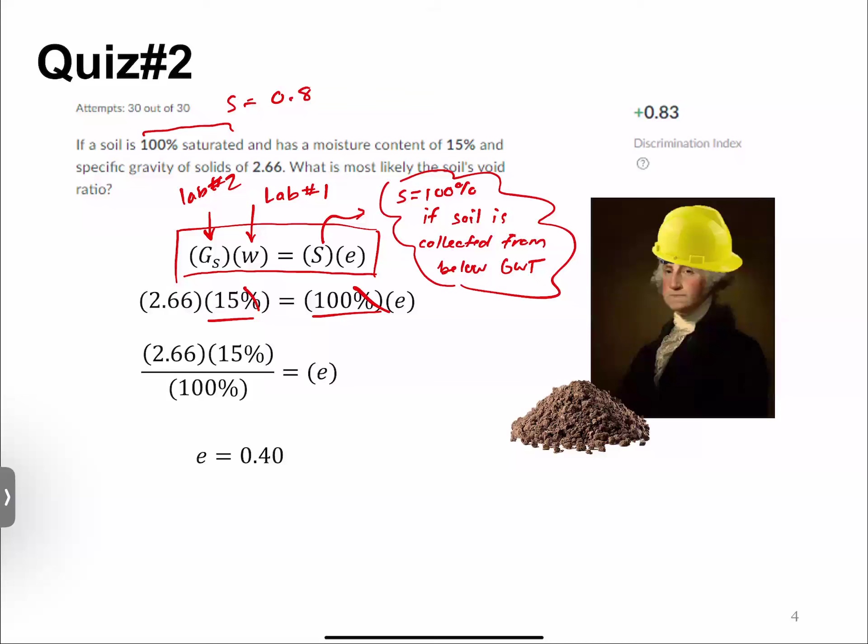Okay, so we're going to wrap up what we talked about last class. Again, I'm just going to put these here, but hopefully you've already filled this out - I don't know why that deleted it here. But we started talking about this range of void ratios.

You have a question? Yes. So you were just saying about how different soils, after time, may not have the same amount of infiltration and stuff. When you take that core sample, do you really just see the different layers of sediment, or actually how dense the material is? Yeah, so it depends on the type of coring that you have.

There are different testing methods or ways of retrieving soil out of the ground that will either keep the soil intact fabric-wise, to make it a nice representative sample of what it's like underground, or just pull it up so you can run a grain size distribution or something where the moisture, or one of these values, isn't going to change with disturbance like compaction or void ratio. We'll get into that when we start talking about subsurface testing techniques. But your typical boring will wash it with water to drill through it, so you're messing up the groundwater regime, you're messing up the soil fabric, because you're essentially pressure washing the soil. That's a good question - we'll cover that in a lot more detail in a few lectures.

So that range is important. We talked about the different correlations to that. And what I wanted to introduce is this theory of what we call empirical relationships, which maybe some classes you've gone over have used before, but they are really heavy in geotechnical engineering, and that's because geotechnical engineering is very site-based.

So empirical relationships take data from the field, from experiments, and then set some type of statistical correlation or statistical function so we can make a prediction based off of the data that we have. So this is really helpful, but there's a huge caveat: this function or empirical equation is only accurate or proven worthy of use for the data that is training it, essentially.

And this is a whole thing too with AI, if you've ever gotten into that, the data that you're using to train your AI model is just as important. So this empirical relationship is only developed based off of these factors here, this data that they use.

So nowadays that we're sharing a lot more data, and we have communications and collaborators in all the different continents and are able to share data, we can start to make some of these empirical relationships a little bit more robust or more applicable to various types of data. But it's always important to keep that in mind when you start seeing this.

Because geotechnical engineering is full of these empirical relationships. Hopefully you can start to identify them based off of these equation formats. They're usually pretty easy, pretty linear or a log-based equation.

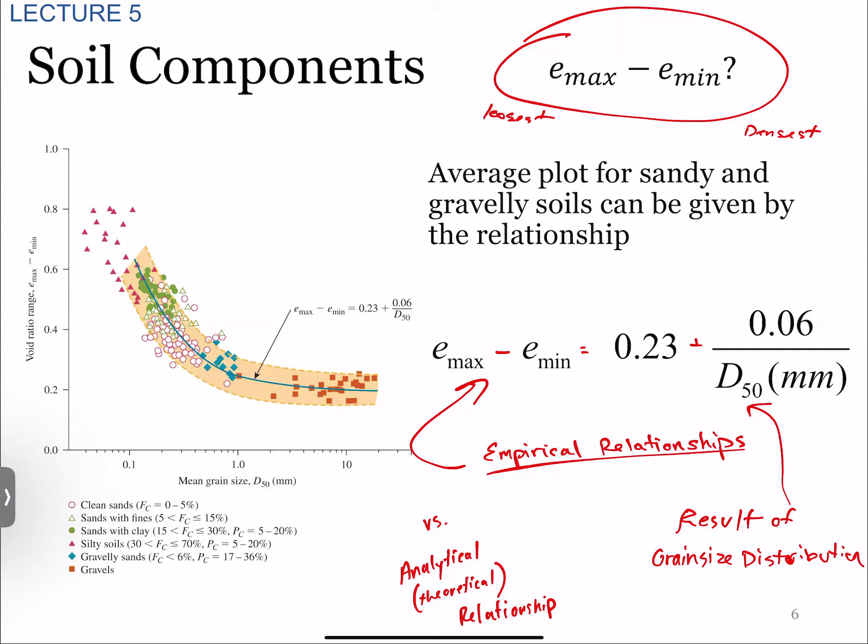All right, so that's where we ended on lecture 5 from Thursday, but we have a few more slides I want to go over. During the very beginning, when we were talking about a bunch of different types of parameters that we care about, I had mentioned submerged density.

Submerged density is shown with a little apostrophe after it. And what we use more so is submerged unit weight, which is gamma prime here. The other way of showing this might be gamma sub. We use this when the soil is 100% saturated and when the in situ soil is under the groundwater table. So submerged density, the effective density, is also what it's called.

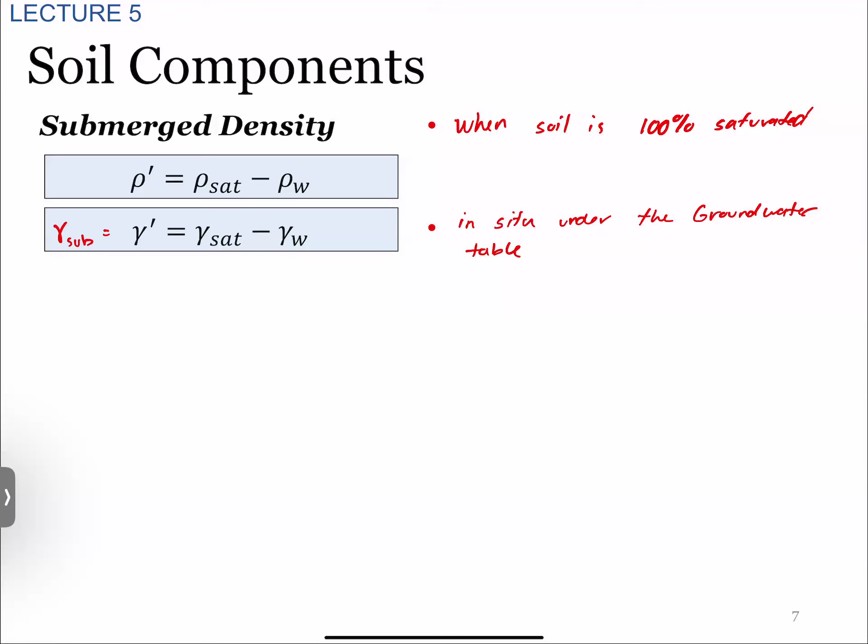It can be kind of hard to think physically about what it means. The best way I was explaining it is like, okay, you have a bucket full of soil and then you fill up that bucket with water. So the soil in the bucket now is at a saturated density. But then let's say you take that bucket and put it underwater - the perceived weight or density from your standpoint, since you're underwater too, is going to be lighter or less dense, because when you lift up stuff underwater, there's a buoyant force associated with it.

So that's kind of where this comes from a physics standpoint - we have this density of solid, a buoyant force, and the weight of solid underneath it. The reason why we would use this will be highlighted especially the last month of the semester, so we're going to fast forward essentially. But the whole reason we use submerged density in our stress calculations is because the groundwater table can potentially change.

So long story short, we know density is correlated to the strength of our soil - remember that little graph, density versus strength. Density is controlled by the soil weight, which is then controlled by the soil stress. The more we're pushing down on the soil, the harder it is for those soil particles to slide around each other. So if we're in a saturated condition, the density of our soil is higher than if we were in a non-saturated condition. We know that gamma sat is greater than our gamma normal, which is greater than our gamma dry.

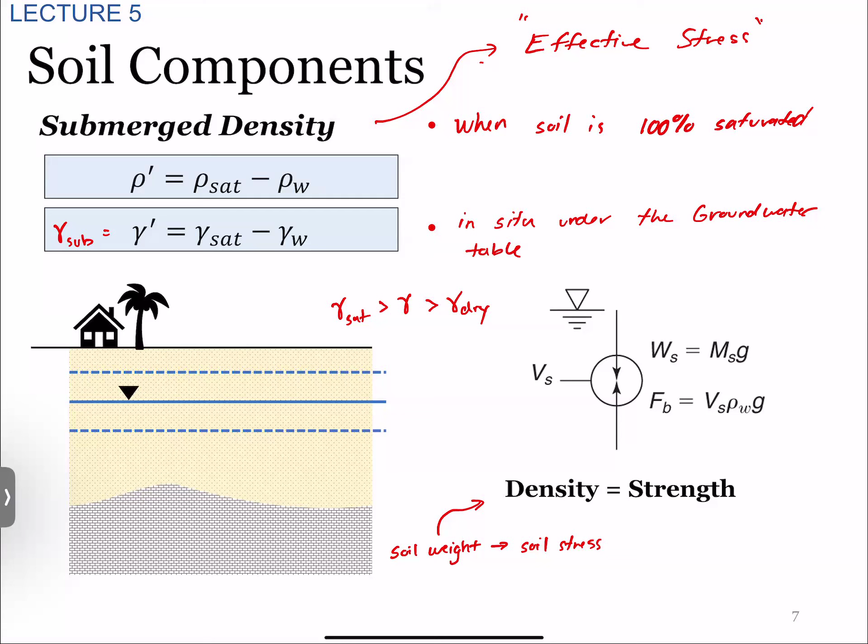So an example of this, and we'll highlight this too a lot later. Why would we care about this? The groundwater will change, so therefore the soil density and strength can change. This is mainly so when we start talking about design or using earth or soil to achieve some type of structural purpose, like if we have a retaining wall right here.

So we know a retaining wall just from physics, why would this retaining wall want to hold up, or how is it holding up? Right there, gravity. It's just a super heavy thing, coming in and out of the paper. It might be curved a little bit, but we know that there's a dead weight of soil wanting to push it that way because soil is granular.

But then we also have this resisting force that's due to the weight of our wall. In order to combat this, what a lot of times we'll see is a cantilever style wall, a type of retaining wall where it would be an L shape. It might also go a little bit the other way. But essentially the reason why we have this is this block of soil is causing it to stay in place, increasing the effective weight of our wall. So now this block of soil is allowing some resistance against this.

Is that what those straps do in the MSE wall? Kind of, one spoiler. No, not really, but we'll get into that in a little bit.

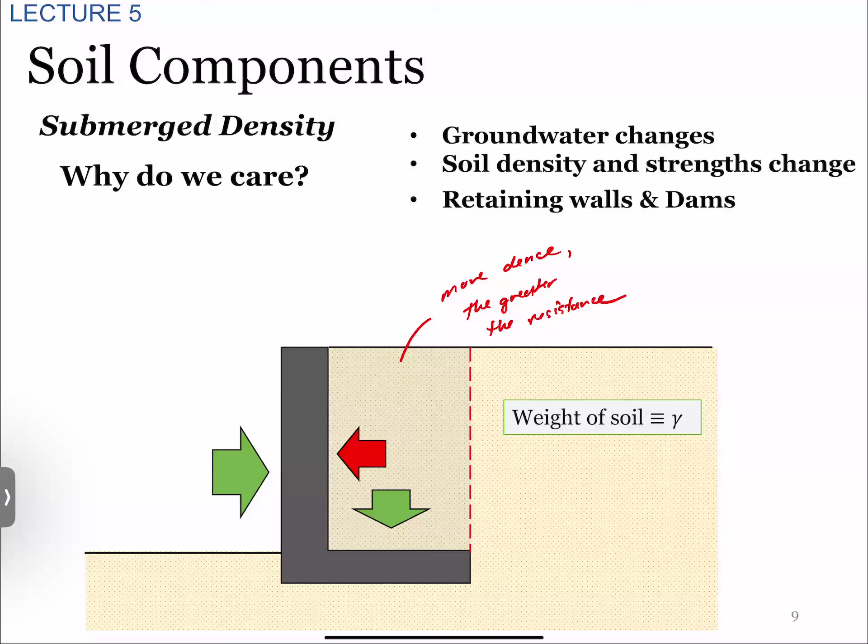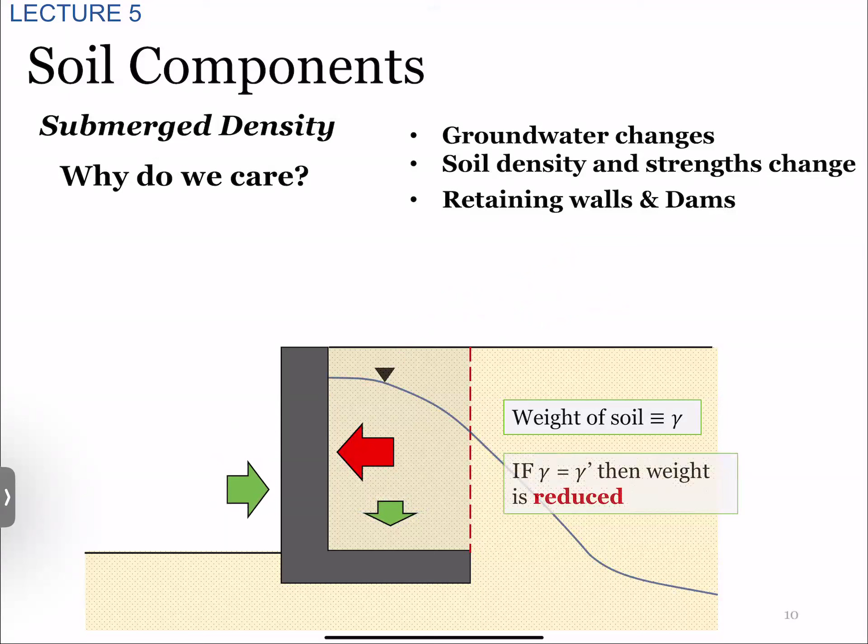So let's say we have a groundwater table or some type of ponding, or it rains and we have water buildup in this area. If we have this, then the groundwater table is now going to be our submerged density, and the weight is going to be reduced effectively. So because of this, our resistance down here is a lot smaller. If we designed for the case where the density was wet and we have this case, then we could have failure because now this resistance is a lot lower.

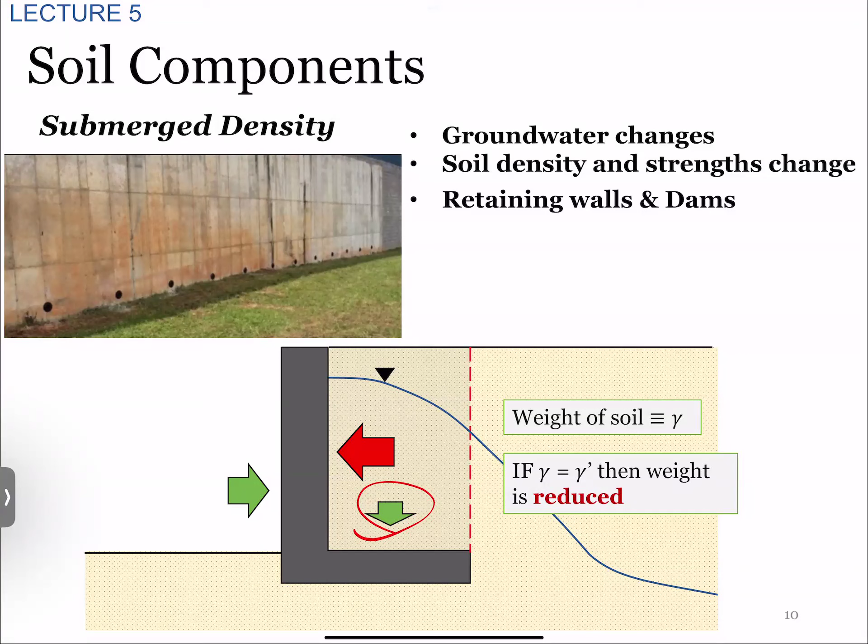So that's why you'll usually always see weep holes or some ways to ensure that water does not build up beneath or behind the retaining wall, because you can change that condition. Or if you don't have that case, then you would design for the effective condition, accounting for the lower density of our soil. That's just a little example of that.

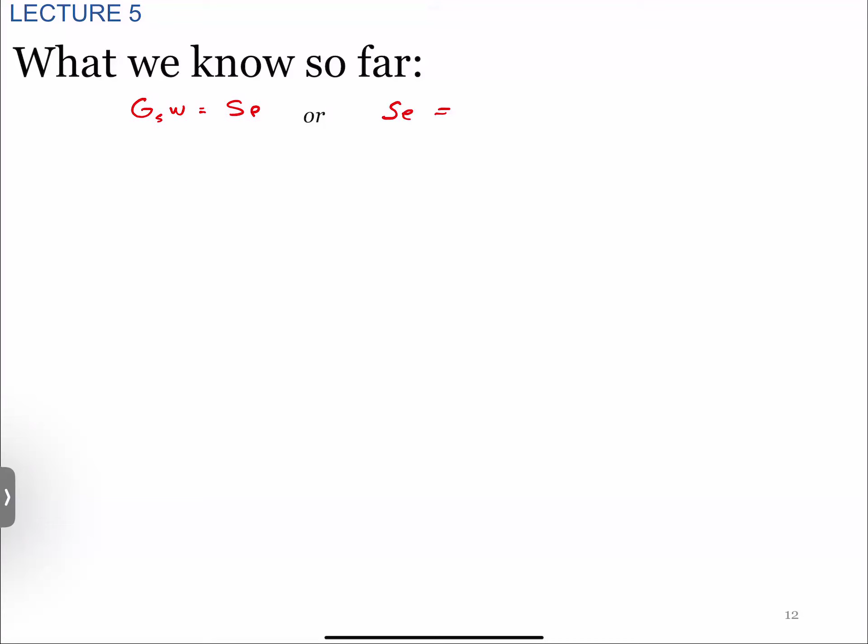Okay, so the last thing I want to talk about is recapping what we know so far, some really important equations. The first one being the one I already talked about ad nauseum, but is very important. However you remember it, please try to remember this equation.

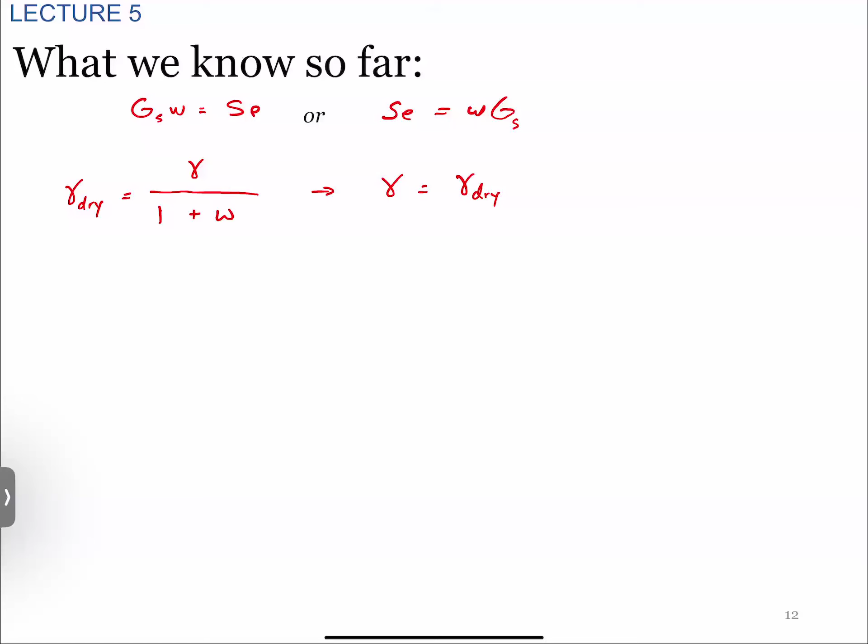The other really helpful one is the correlation for dry unit weight to moist unit weight. Our dry unit weight is equal to our moist unit weight, or unit weight with some moisture in it, divided by 1 plus that moisture content. And the moisture content is in decimal form, so it wouldn't be 1 divided by 100 and something, you could divide it by 1 point something. So you could rearrange this to solve for it this way too.

The other one that is helpful along with the dry unit weight is specific gravity of solid times unit weight of water over 1 plus our void ratio. So it looks very similar to the other one, but with different parameters.

And let's say we wanted to combine these two equations, we could also solve for this: the normal unit weight equals 1 plus our moisture content, times specific gravity, times the unit weight of water, divided by 1 plus our void ratio. This is also a helpful equation.

And then the other one that is important is the saturated unit weight: GS plus E, all over 1 plus E.

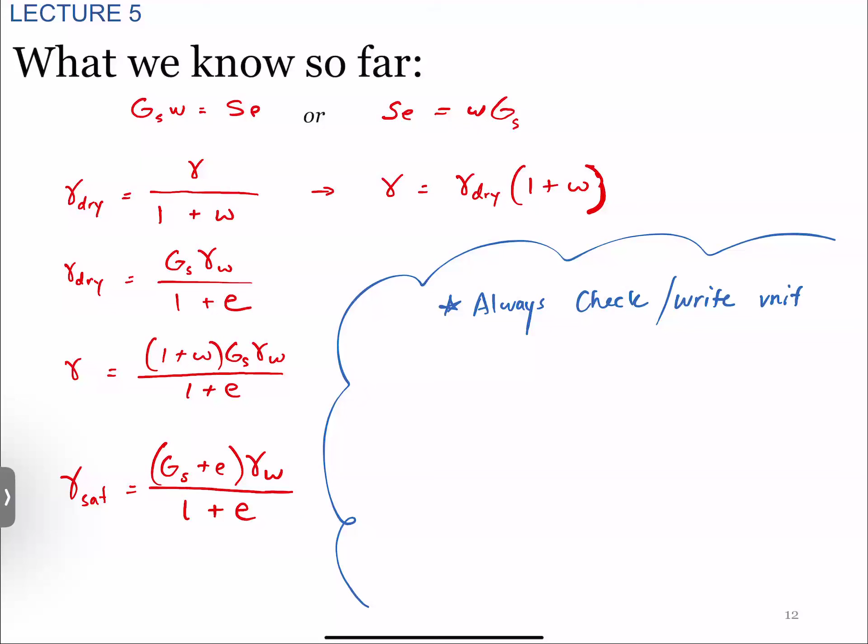So the things to remember with these: always check or write your units down. This will be the best way to ensure you aren't messing stuff up, especially with densities. I'd recommend writing it in your equation and physically canceling them out, to ensure your void ratios are in the same decimal form, your unit weight of water is correct, and your solution is in the correct format. Especially the unit weight of water - make sure you're using either 9.8 kilonewtons per cubic meter or 62.4 pounds per cubic foot. I see that mixed up all the time.

The other thing is remember that void ratio is in decimal form. So sometimes you'll see an E value being 1 point something or even 2 point something. It's supposed to be in that form, so do not convert that into percentage form - just keep it as is.

And also remember that moisture content is calculated in decimal form for these equations. So when we have moisture content in these equations, always divide it by 100, even though it's not shown in the equation, to put it in decimal form.

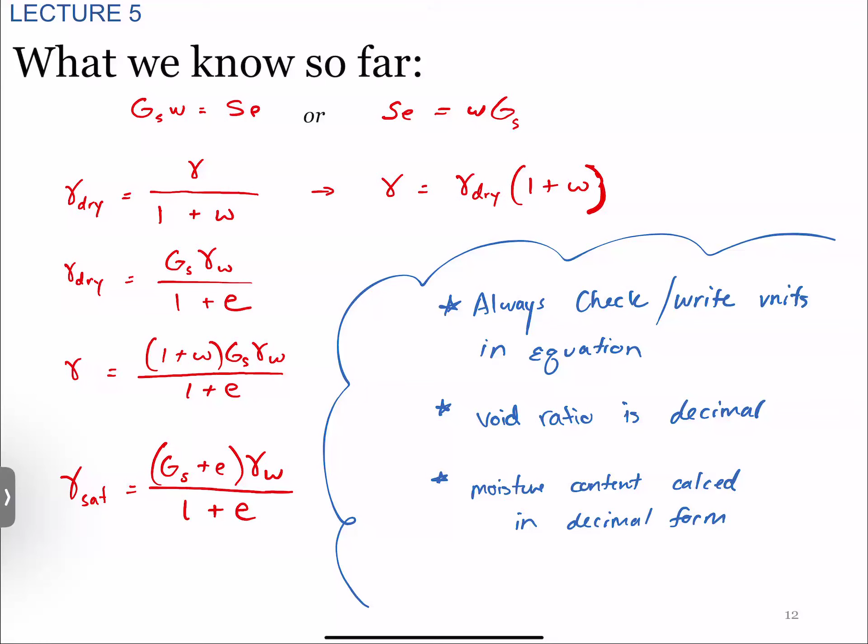Okay, so that wraps up lecture 5. Now starting lecture 6, we're going to talk more about grain size distribution and what distinguishes the different types of material. Have you guys heard the word clay before? Yes. And silt? These are all household words we've probably all used before. Maybe you know some differences from a composition standpoint, but we're also going to see how that composition changes the physical behavior of our clay, and the difference between clay, silt, and gravel. This is all about composition - essentially what are the parts that make up this whole entity, because as we said before, a sample of soil is going to be made up of a bunch of different stuff.

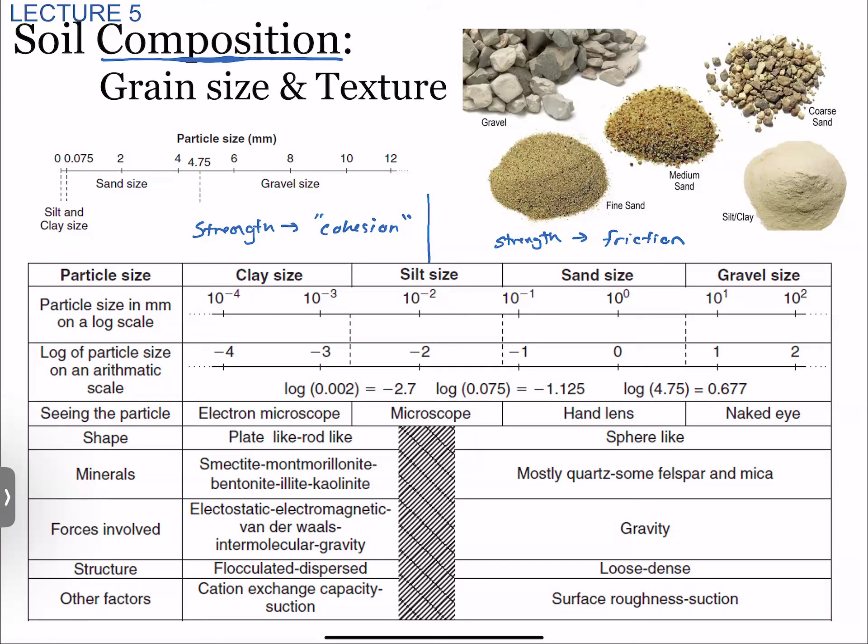When we start talking about soil classification and the tests associated with that, and especially when we start working with some real soil, you'll hopefully be able to see how silts are just not fun to work with. So that's why we have that dash line there. We'll talk a little bit more about that. So some of the characteristics of this, again, with clays, I've used this word already, but with clay we call this cohesive sediment or cohesive soil.

And just go back to red just to keep it consistent. So for sand and gravels on the other side, this is going to be cohesionless. We'll say cohesionless soils or cohesive soils.

Now, silts are for the most part cohesionless. But I'm going to put a little asterisk there because it depends where you are. In Florida, we actually have a good amount of cohesive silts. But in some areas up in like the Pacific Northwest, there's a type of soil called a diatomaceous soil.

Anybody remember from biology class something called diatoms? Like the little bugs that float around in water, or plankton stuff. It's essentially a soil that's made out of the exoskeleton of that stuff. So it's very, very hard to characterize. And it's not cohesive at all because it's a bunch of little tiny dead skeletons of things that look really, really cool under a microscope, but it's a pain to try to build a bridge on, or a structure, or anything like that.

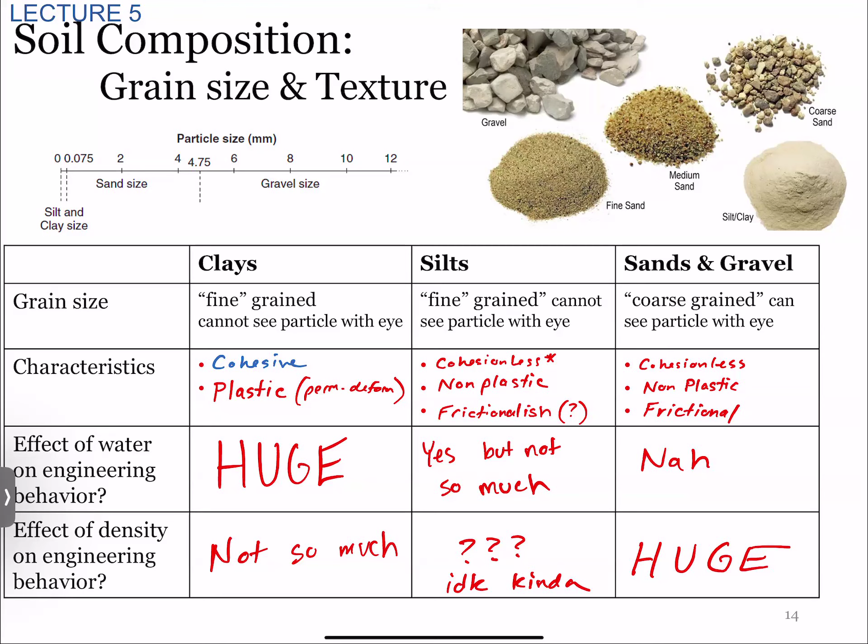So one of the things we're going to start introducing here is the grain size, or the range of grain sizes. This is where we start looking into the classification of soil, and we're not going to get into the classification until after exam 1, but I want to share a little bit of this. The Unified Soil Classification System is one of the languages that geotechnical engineers use to define soil - it's just like a language. You can communicate soil using other classification techniques, but this is just one of them.

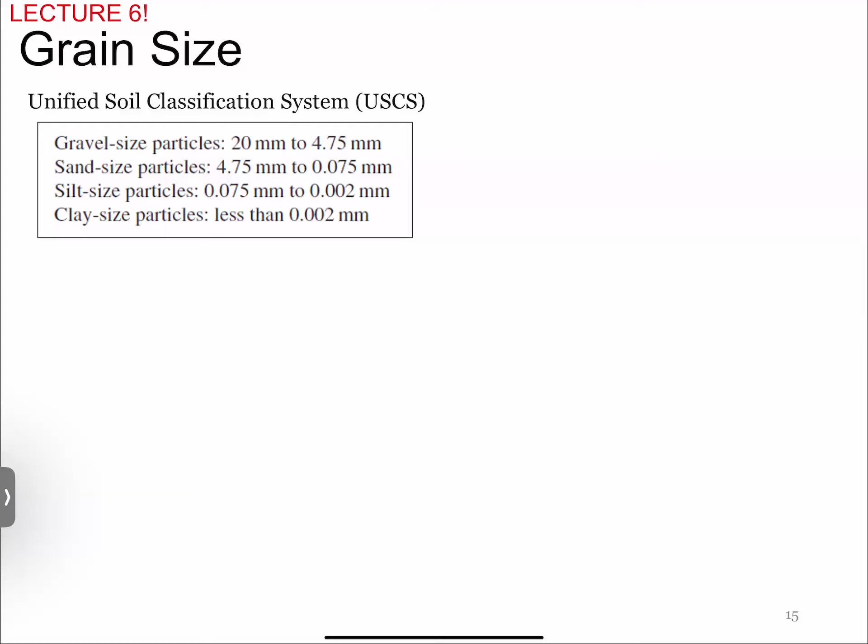So they say that the gravel size particle is from 20 to 4.75 millimeters. Sand size particle is 4.75 to 0.075 millimeters. Our silt size particle is in that range, then clay size particles are less than 0.002 millimeters.

Since I have a computer, I can scale stuff - this is drawn to scale here. If this gravel size particle is 20 millimeters, a lot bigger on this screen, then a sand size particle would look like this. Respectively, we can still see the difference here - the silt size particle is going to be really, really small, and the clay size particle, you can't even see it in respect to the gravel. We're going to talk about this in the lab a little bit later, but this is an important thing to think about when we're talking about engineering behavior.

If you have a bunch of particles this size, it's easier to use math and physics to define and predict how it's going to react when you apply a load to it. But if you have a bunch of stuff that size, or that size, it's going to be completely different mechanic-wise. Or let's say you have a bunch of this stuff covered by a bunch of that stuff - does that silt help the friction? Does it hurt the friction? Does the clay help it stick together? Because remember, we're dealing with mixtures of this material.

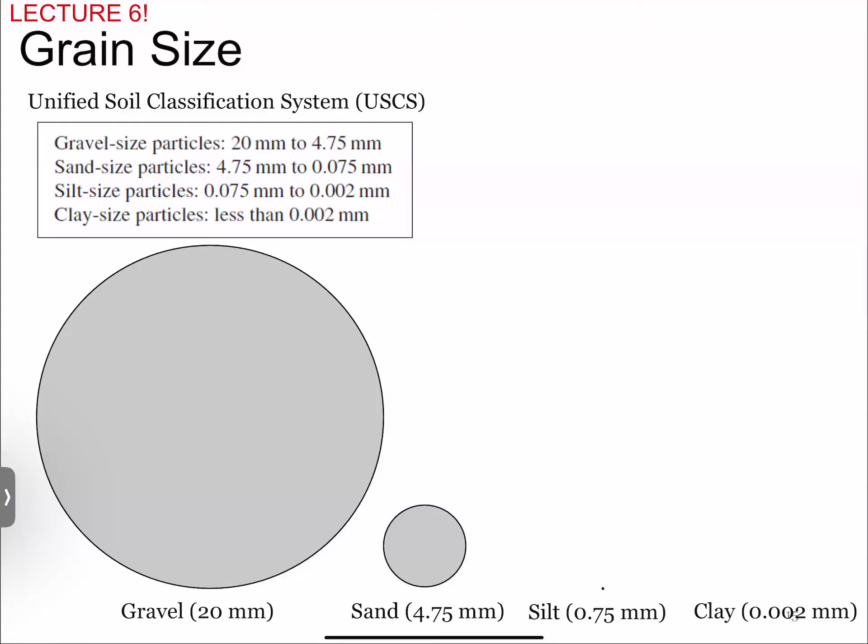So the way I like to characterize it, since a lot of us grew up in Florida and most people in Florida grew up with trampolines - if the gravel size is a trampoline, then the clay size particle would be a flea on that trampoline. So very, very small with respect to the gravel.

Now, if you're not used to seeing these terms, the micrometer is used a lot in this. Micro is just the inverse of a mega, so one over a million. And you also hear this term called a colloidal particle - that's something less than 0.001 millimeters. There's not often times that we would care about colloidal particles because you're getting into smaller stuff that doesn't really matter from a mechanic standpoint, but you might hear that term pop up too.

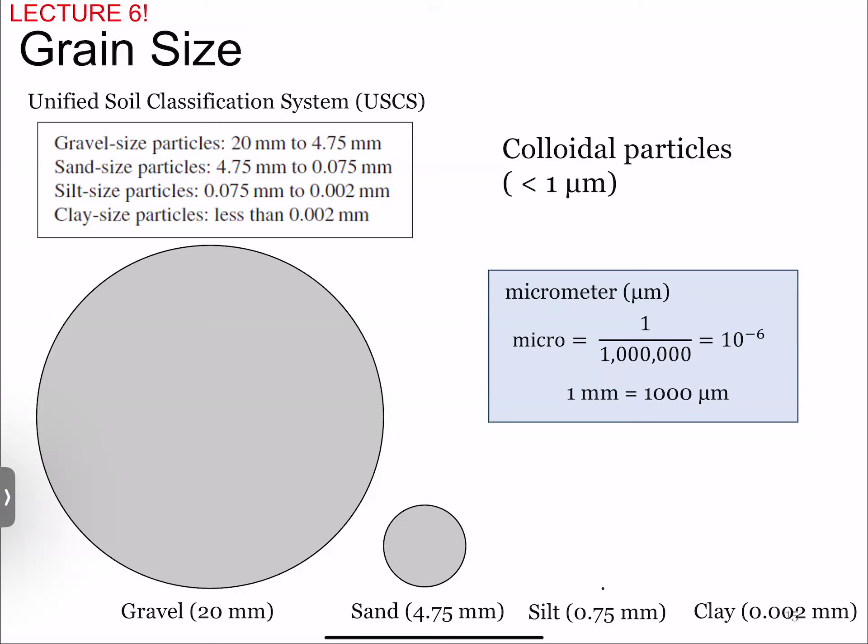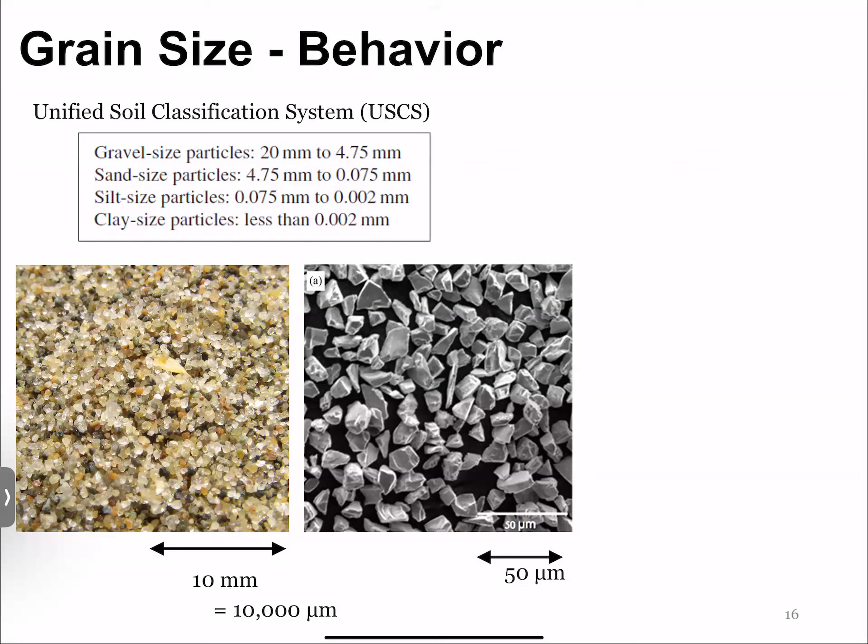So when it comes to the behavior of this, again, these are where the little pictures show up - sand size particles, stuff that you can see, stuff that you can characterize. But when we start getting into some of the silts, it starts looking the same angularity, but much, much smaller. I should have posted a picture of the diatomaceous stuff - this is just a granule silt, so it looks very similar, just much smaller. But when we start looking at some of the clays, that's when the structure of it gets really crazy.

So this is an attapulgite clay. It's a clay that's found in the Hawthorn Group of soils, so it's here in Florida, and it can be very, very small. And that is going to greatly affect how it reacts to loading, and greatly affects how it reacts to water.

So let's start with the easy stuff for coarse grain. The behavior of this - it will behave according to their weight or their mass, so it's all gravitational force. So the density and packing is important for strength, which is why that void ratio is so important here.

Now this picture is just a fancy thing showing how the forces kind of react through everything. And if you want to get into modeling of sands and all this stuff, it's called discrete element modeling, which is like something crazy that computers can now do, where they model each grain of sand individually and they can see, okay, this grain of sand pushes on this, which pushes on this. It's like a giant reaction, and they can actually track that mathematically. So all that to say is that coarse grain soils, I don't want to say it's easy, but it's maybe easier to model or predict the mechanics.

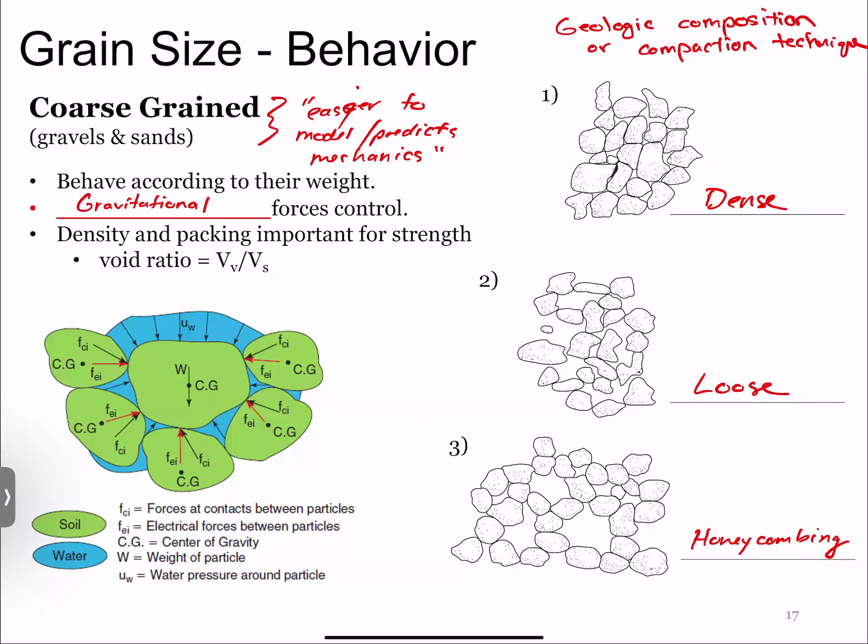So yeah, I mean, I don't listen to Joe Rogan or any of those people, I don't know if they talk about it, but the honeycomb shape is just a weird thing that you see a lot in nature, and even in inorganic soil - a lot of times our geologic formations will have this kind of arching established in it.

And essentially you see these little arches form. Now, in this case, we might have a very strong material in one direction, but it might be weak in the other direction. And so that's that fun word called anisotropy, or anisotropic, if you guys remember that word.

You guys heard that word before? Okay, anisotropic just means the behavior, the parameters, or the material is different in one direction than in the other direction. So you might see honeycombing in certain types of geologic formations, and that's also why this comes back to the geologic composition.

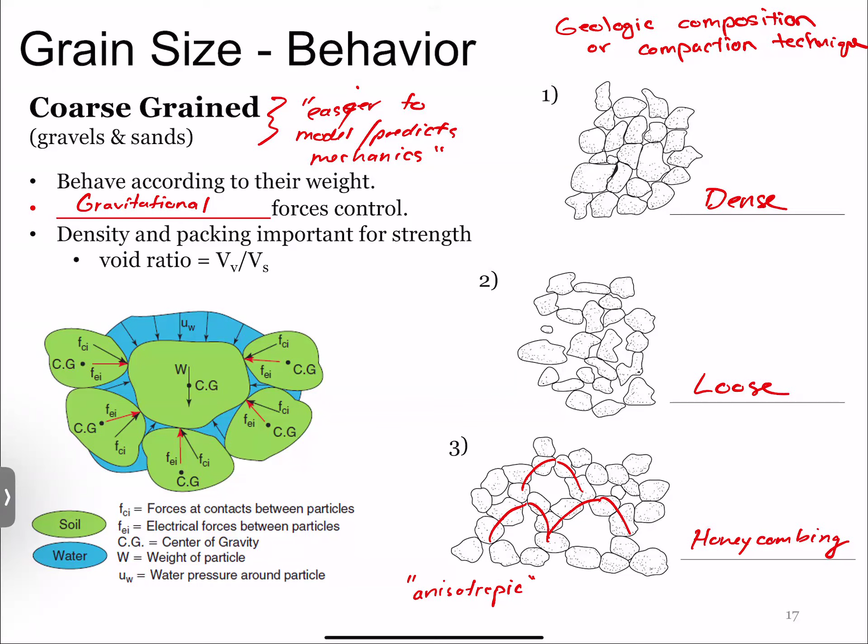So the grain size for coarse grain is nice and easy. As I said before, they behave according to their mass. So the things that we will care about are the void ratio and the density. But also these cannot alone characterize the anticipated engineering behavior. We also have to look at the structure and the angularity.

This is why the geologic depositional process is important, or even the composition of it. So this is just kind of a cartoon example of how it could vary. If we have, remember, void ratio, structure, or density - void ratio is volume of void over volume of solid, and density is the mass divided by the volume.

So let's just say each one of these little bricks or squares is a unit volume or something. You can kind of see how these might have a similar density, the same amount of mass in that little square, but the orientation could completely change the permeability, could completely change the strength, because this is more of a honeycombing versus a well-graded material.

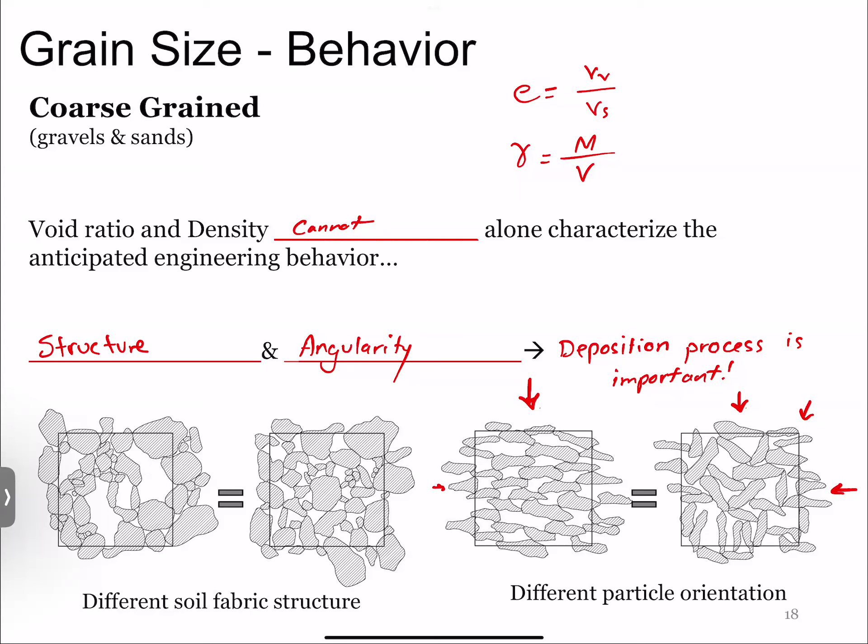So they're formed from gravel, sands, and silts - these are all usually formed from physical weathering, like abrasion. But clays are formed using or from chemical weathering, so an example is hydrolysis. So that's why the mechanics are completely different and they're more chemistry based.

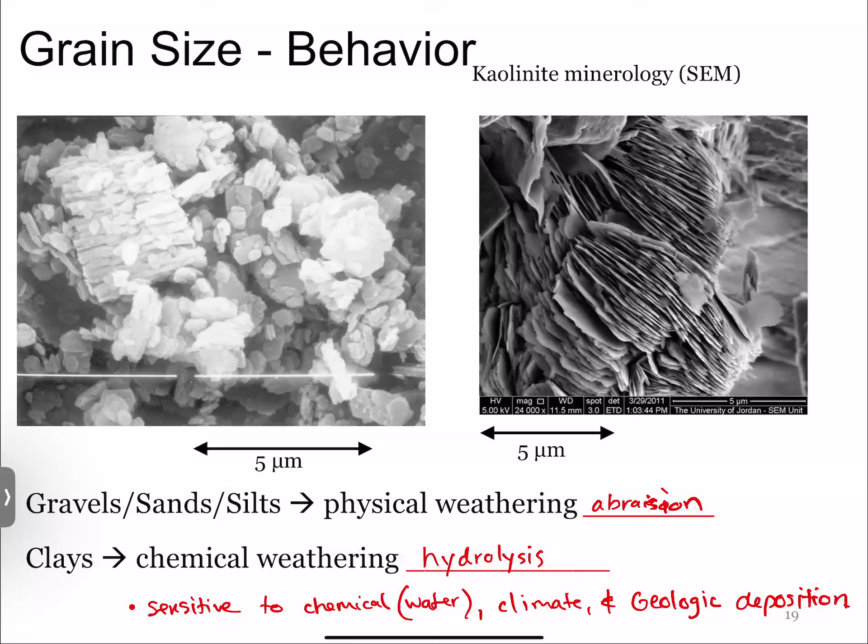So for the three of you who like chemistry, these next two slides are for you guys. Clay minerals are composed of these super fun words that will impress all your friends back home.

Silica tetrahedra, and alumina octahedron. So most of our clay minerals are composed of these two things: silicon and hydroxyl, or aluminum. These combine to form different plates that are stacked on top of each other. So you would either get a silica sheet or an octahedral sheet.

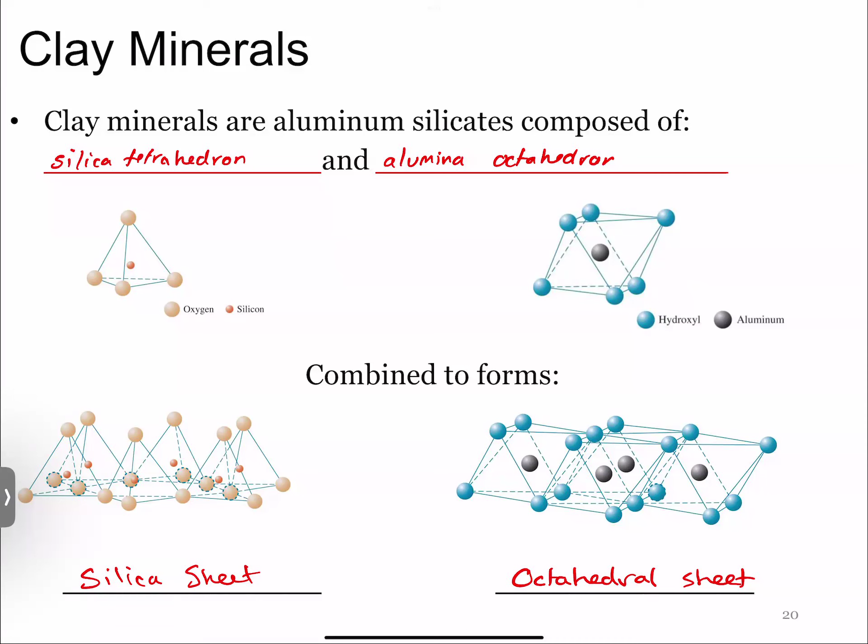This is what's actually making up these plates, these two things. Hopefully you can see, based on how this looks with triangles versus something more intact, how introducing other chemicals or even just the structure might change based on the orientation of it - like a slip surface here where it might be a little more dense.

Once we have these different types of sheets, how they are attached together also plays a role in the mineralogy. This cartoon shows some of the three most widely known types of clays - kaolinite, which is a silica sheet and then a gibbsite sheet. I have no idea what that is, but it's 7.2 angstroms, which is really, really small.

Just for example, 1 millimeter is equal to - just trying to memorize this off the top of my head. Obviously you don't need to memorize that, but just know it's very, very small. That's 1 millimeter, and this is only 7.2 of those angstroms.

So kaolinite is one of the most common types, and it's a very basic mineralogy. One of my personal favorites - for somebody who grew up in the 90s and used the word 'ill' a lot - illite is a good one. That's connected with potassium and has a little bit more structure. Then the other one we talked about here, that's a mouthful: montmorillonite. Now all of these are just big words for right now.

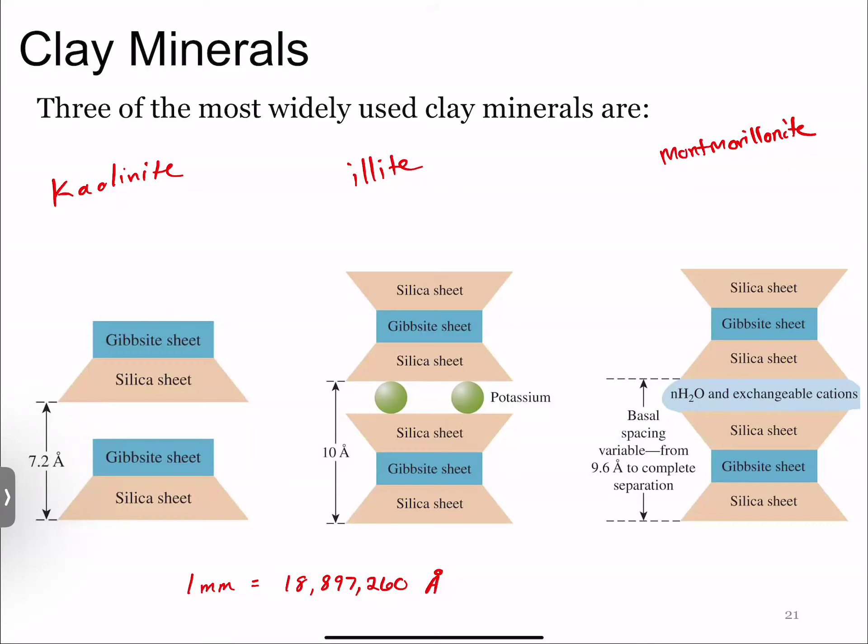So if you're in that industry at all, you'll hear these words a lot. And what I talk about there is, because of this, the clay particles will carry a net negative charge on their surface, which means they will greatly affect the water because water is dipolar. So water and clay...

So why this matters in this case: it is often assumed once clay is saturated, it stays saturated. Once the degree of saturation of clay is 100% - say it was once deposited in an ocean and the degree of saturation is 100% - because of that attraction, even if the groundwater table decreases, as long as it's not placed in an oven or left outside at the surface and desiccated, we usually assume the degree of saturation of clay is 100%, which makes the math and mechanics a lot easier.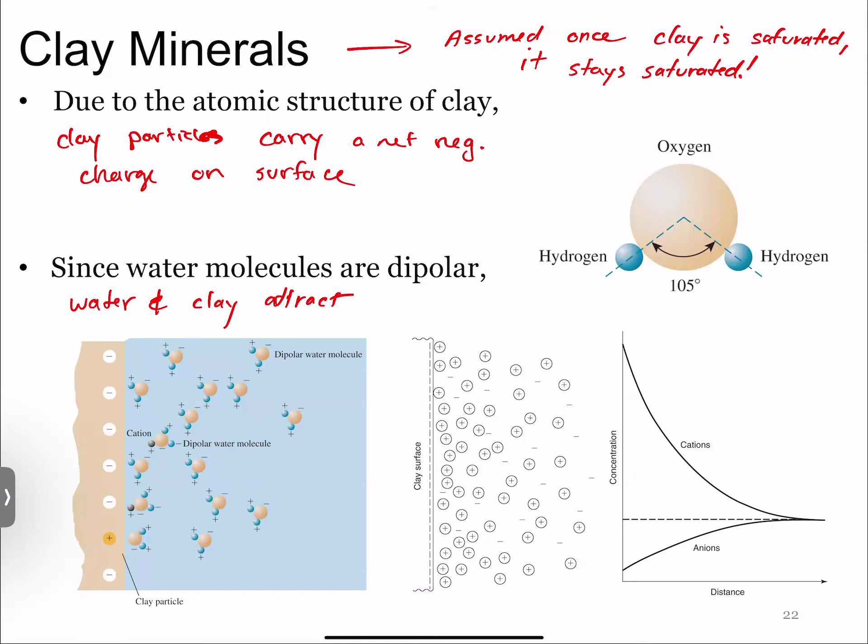Okay, two more slides here. So the whole thing is, we are talking about clay particles, but also particles being combined with other things too. I'm sure everyone wants to impress their friends with that trick at McDonald's, but that's essentially what clay is doing whenever we are adding water or changing the water.

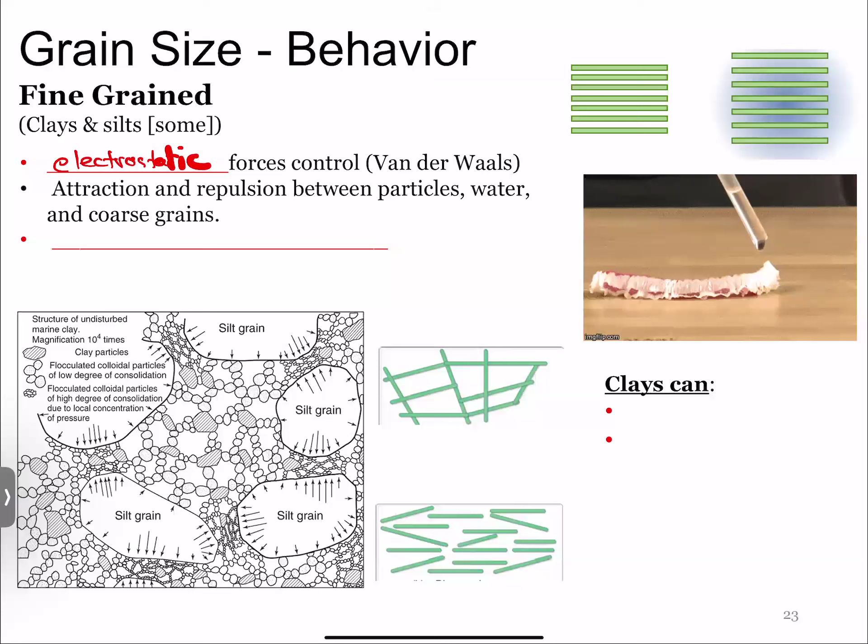So for clays and some silts, it is all electrostatic forces. Van der Waals. So therefore the chemistry and the pore fluid is important, or is critical.

Especially when we think about this clay being mixed in with other materials. If we have sand mixed with clay, or silts mixed with clay, and we add water, that clay can push up and cause some of the silt or gravel particles to move around. So clays can either swell or shrink with water.

We can have swelling clays in Texas, Louisiana. This is really common where you build houses on clay in the wintertime, and then when the rainy season comes, the houses all get pushed up because the clay swells and increases. But also we can see clays change plasticity, or they can change the mechanics based on its moisture content. That's the important thing to remember with clays, and that's why we have experiments just to characterize clay based off how the increase or decrease of water changes its behavior.

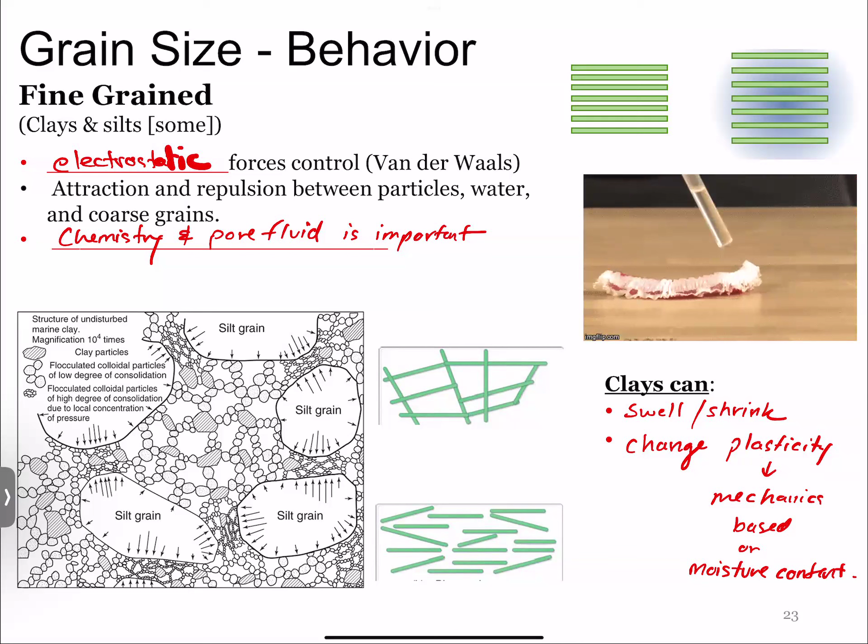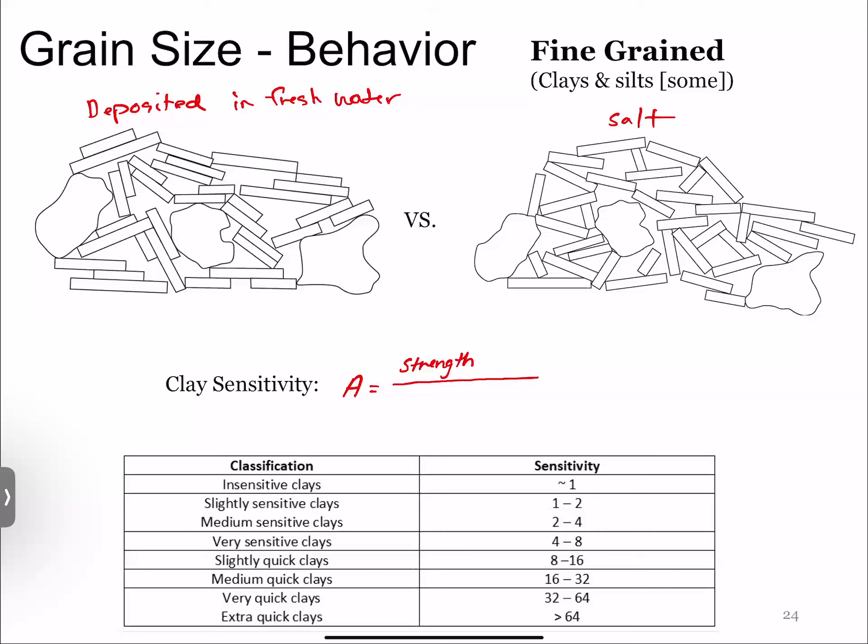So what we do is we test the strength of the clay, or the cohesion of the clay, in its natural state. And then we divide that by the strength when we remold it. Remolded means we put it in the form that it originally was in.

So the way to think about this is, let's say you buy a fresh new thing of Play-Doh, and we're all getting the nostalgic smell of Play-Doh in our mind right now. If we pull that out right away and smush it, we see how much force it takes to actually smush that Play-Doh. Then we take that Play-Doh, remold it back into the container, fit it back in, and do the same thing again and smush it again. The difference in that percentage the first time would be the natural state, and the second time would be the remolded state.

That would tell us insight into how the clay is deposited, because once we mess up the fabric, will it retain its strength? This is a very common thing you might hear people say about these extra quick clays. Remember that Norwegian landslide we were talking about, the extra quick clays? This is where it's very strong in its natural state, but as soon as it is remolded, or as soon as it gets messed up, it loses all of its strength. And then we have those crazy landslides as a result of that.

So this is one of the ways that we characterize clays. We'll talk about some of the others, and also get into some of the material for our exam in our next class.